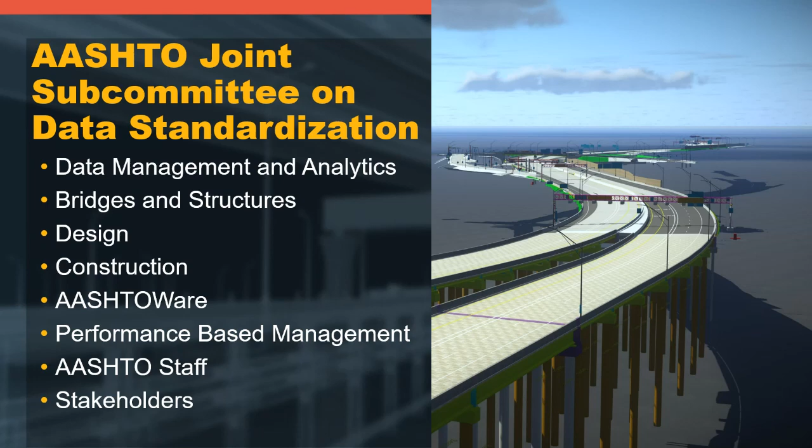And these are some of the high-level goals that Mike provided for this group. And really, a lot of it is coordination. It's coordinating with all these different AASHTO groups, to talk about open data standards and how we coordinate adoption of those standards amongst the groups. And really, Mike has told me too that they really want to eliminate duplication of efforts. So they really want to optimize efforts across the different groups, as AASHTO moves more into open data standards. So like I said, you'll see a lot more on this group in the next few months.

And with that, I'll turn it over to Jim to give an update on the BIM for Bridges and Structures Transportation Pooled Fund. Thanks, Will. Thanks for the opportunity to be here.

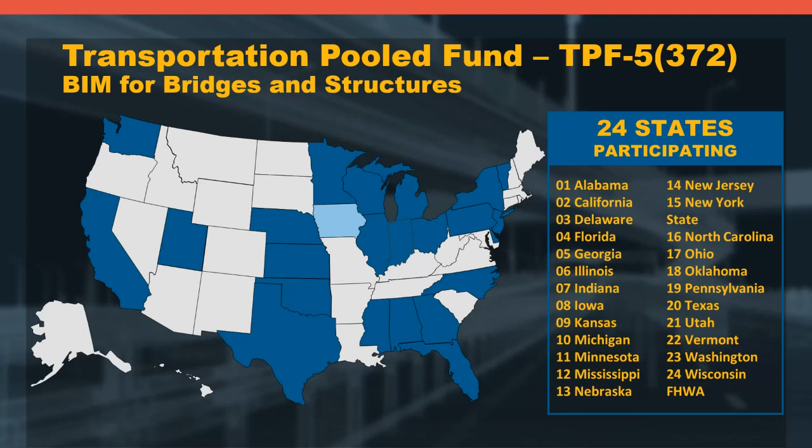The Transportation Pooled Fund, BIM for Bridges, is a product of 24 states and the FHWA. It's very much a national effort that has produced an IDM that will be balloted at COBS this year. In 2019, AASHTO adopted the IFC standard. Next slide, please. As you're probably aware, we are in the midst of a paradigm shift in our industry. We are shifting towards digital delivery, model as a legal document, and digital as-builts. The overall AASHTO Bridge vision is to have a model-based approach through the life cycle of a structure.

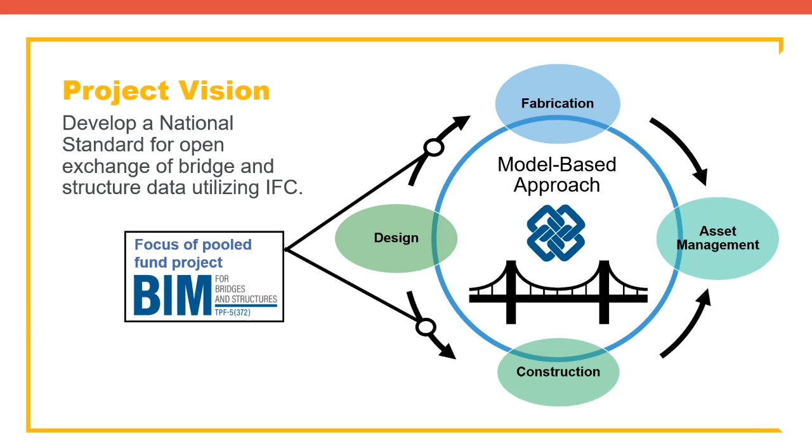The BIM for Bridge Pooled Fund project is a critical piece of the puzzle so that these things are even a possibility. The focus of the BIM for Bridge Pooled Fund project is related to the exchange of information, the design process to fabrication and construction. The project is about developing a software standard utilizing the international non-proprietary IFC. A separate BIM for infrastructure project will be starting soon. 18 states have committed to sponsor. Hopefully this will be getting started in '22 or '23. More states are welcome to sponsor. Next slide, please.

A BIM for Bridge project objective led to the adoption of the IFC for the U.S. bridge industry. But what does this mean? So an analogy is a PDF is a 2D exchange, essentially a national standard, although not officially necessary. PDFs work because it's an ISO standard. It's an open, non-proprietary format. It's easy to share PDFs. Most softwares have an export to PDF button.

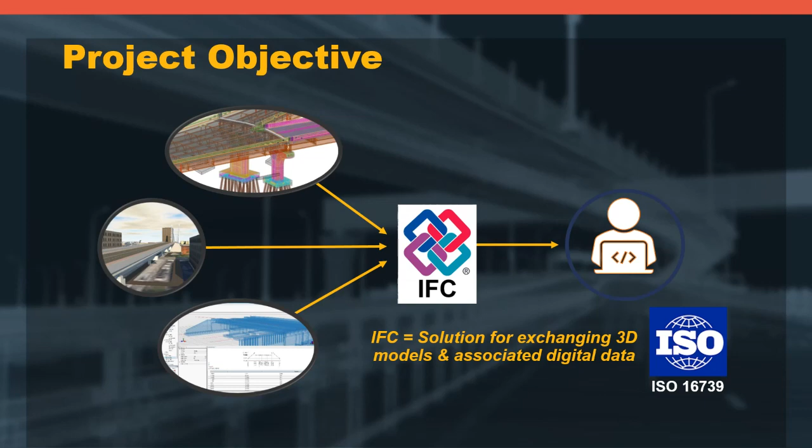Going back to the project objectives, IFC is a solution for exchanging 3D models and associated data. IFC is also an open, non-proprietary format. It is also an ISO standard. The challenge is that software does not have this export to IFC button yet for modeling bridges. The goal of this pooled fund is to make that happen. IFC 4.3 is expected to get ISO acceptance either in Q1 or Q2 of '23. Next slide, please.

The BIM for Bridge pooled fund objectives. Objective 1 was to develop IDMs. This will be balloted this year, and I'll talk a little bit more about that in a little bit. Objective 2 is develop MVDs. The first MVD is close to being completed and is expected to be balloted next year. Outcome 3, development of a software certification is being developed currently along with the unit test suite and should be completed by the end of year 5 work. Stakeholder training is scoped and is part of year 5 work. Next slide, please.

So what is an IDM? An IDM is a document that captures the information that's needed to be exchanged for a specific purpose that will be balloted at COBS this year. An IDM provides a human readable set of information requirements for exchange of model-based information to execute the construction of highway bridges in the United States. It provides an industry narrative that defines the data requirements and informs the development of IFC technical details.

Next slide. The current IDM being balloted is from design to construction: specific data exchanges for design to construction for a set of bridge types. Currently, we have not focused on unique structures, but are focusing on what the majority of the bridges are. So we had slab bridges, girders will be defined, common buried structures, retaining walls. Additional IDMs can be built for other uses in the future, construction to as-builts and as-builts to asset management to complete that life cycle management. Next slide, please.

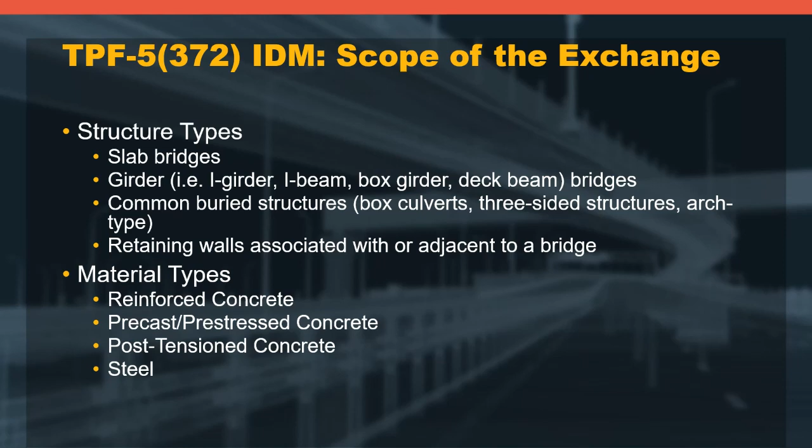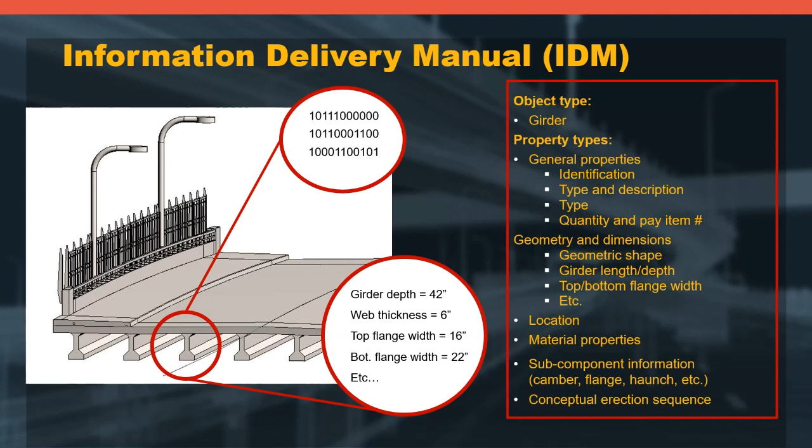Oh, kind of already covered this one. This is kind of the data that's associated: a pre-stressed girder, you got to define the strands, depth, and all the items associated with it. I think we can move on to the next slide.

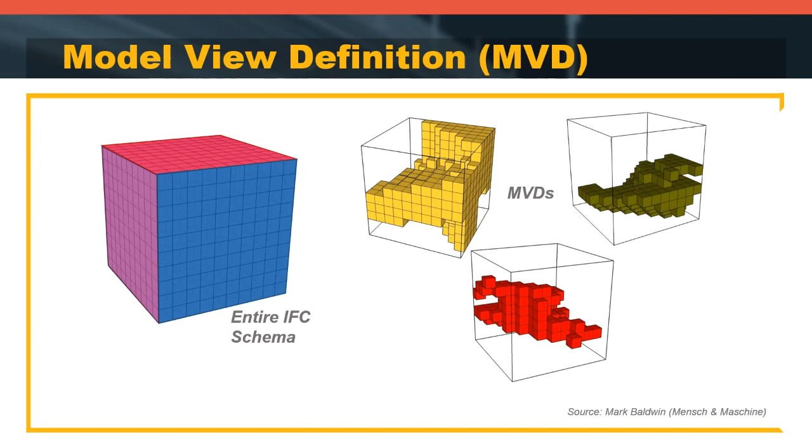So I want to talk about model view definitions a little bit, just because we talked about IDMs. A model view definition is a subset of the overall IFC schema. It is necessary to support one or many specific data exchange requirements. Model view definitions allow us to exchange only the information that is needed for a particular transaction. Software vendors then implement specific model view definitions. The combination of all the model view definitions are what make up the entire federated digital model that someday, hopefully soon, we will have. Next slide.

So the BIM for Bridge Pooled Fund received a 1-year extension, and that's year 5. We've identified some tasks that we wanted to complete with this 1-year extension. We're going to provide technical assistance to the vendors during the buildingSMART International (BSI) certification process, and develop transition plans with recommendations for continued management of the collaboration. Next slide.

The second BIM for Bridge Pooled Fund. So 18 states have committed to funding the BIM for Infrastructure Pooled Fund, and more states are welcome to sponsor. The second BIM for Bridge Pooled Fund will be a continuation of the first BIM for Bridge Pooled Fund. We developed one IDM as part of the first BIM for Bridge Pooled Fund. We need to develop more.

There is a separate, as I just mentioned, BIM for Infrastructure Pooled Fund, and this would be a parallel effort with them. So a lot of things need to happen, but in order to keep pushing BIM for bridges along and keep developing and keep the momentum we have, we felt it's necessary to have a second BIM for Bridge Pooled Fund. And so we've gotten, I think, 10, 11 commitments already, and would be very happy to have more sponsors and continue that effort moving forward.

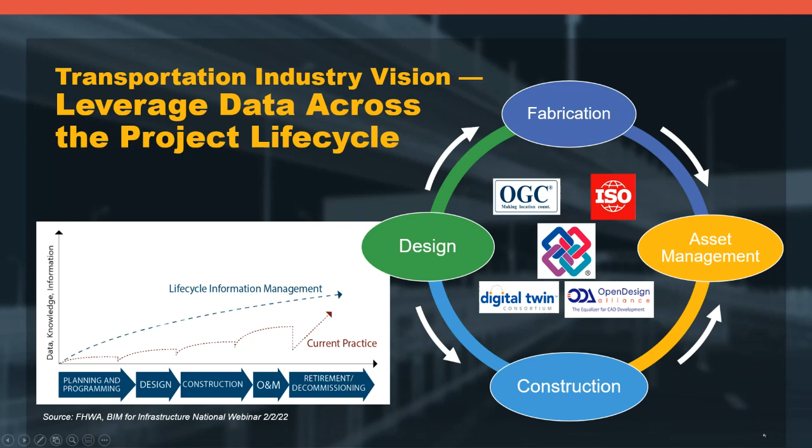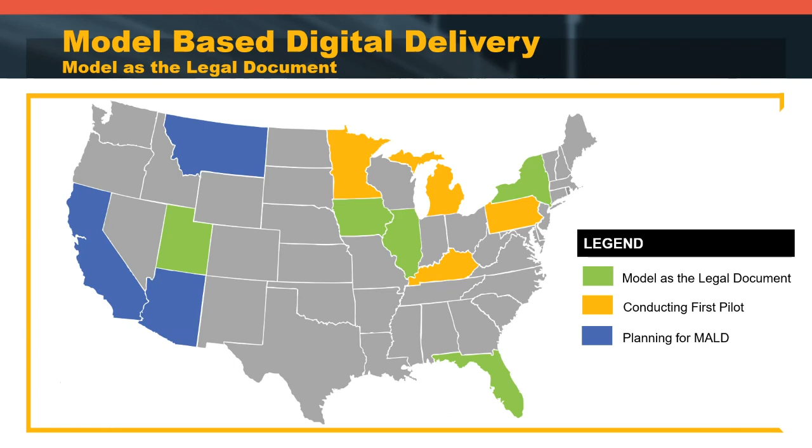So I often get asked, and we talk about this a lot with ACEC, with the Transportation and Risk Management Committees, how is the risk different when using BIM as a contractual deliverable? And there's several things to keep in mind here. One is the tremendous amount of digital data involved. We're talking construction level accuracy models that'll support automated machine guidance, grading and paving, so that's much more challenging to develop and check that information. I can tell you also from the consultant perspective, there's many unknowns with these 3D contractual deliverables. There's no established standard of care with this type of data.

So next slide. So one of the things that John Rathke and I did with Matt Reifer's help with ACEC is we sent a national survey to the engineering companies just to identify, what are your concerns with model as legal document. So this was back in February of 2020. These are the top 5 concerns that were noted. Number 1, data security. How do we lock down these digital deliverables so they cannot be inadvertently changed? Number 2, clear definition of the model accuracies and tolerances.

I can tell you as a professional engineer, we need to understand what we're signing, and really what level of information is really expected with these. How do you QC these 3D models? There were also discussions about lack of contractor experience. I know many of the major contractors have embraced digital delivery in BIM, but many of the subs have not. And how are they going to use this 3D model information? How are we going to get it into formats that they can use with their software? And then the last issue was just the investment moving to this new technology.

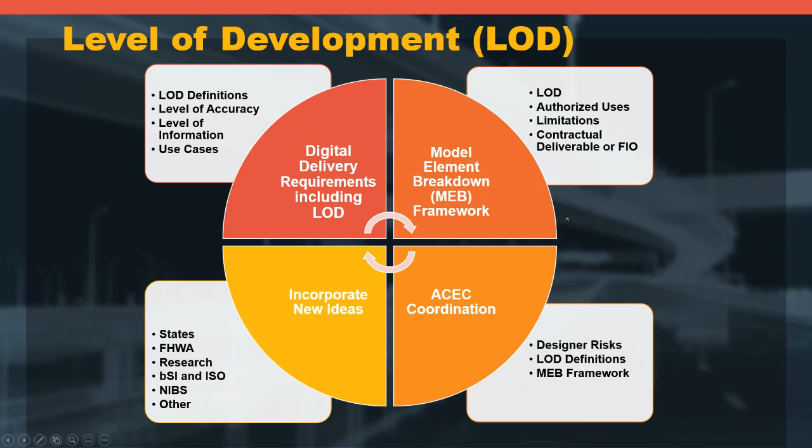So next slide. So with that, I'm going to turn it back over to George to go through designer perspectives. Thanks, Will. So we're going to have 4 of our consultants talk about their experiences delivering projects with model as the legal document. Today we have Grant Schmitz, Nicole Williams, Gordon Green, and Tyler Turner. Grant Schmitz is a bridge engineer in HDR's Des Moines office. He has 9 years of experience in bridge design, modeling, and inspection work. Grant's been heavily involved in BIM for bridges and structures over the last 5 years. His work assisting with the development of the I-80 and I-380 bridge BIM models led to one of the nation's first 3D BIM deliverables for a design-bid-build contract. Since then, he's been involved with a number of other states and national initiatives to promote and enhance the use of BIM.

Gordon Green is the Executive Vice President at Patel Green and Associates. With more than 22 years of experience, he has built a diverse technical foundation, serving as a project manager, engineer of record, and principal in charge of projects throughout Florida. He served as project manager and roadway engineer of record for the Polk Parkway 3D AMG pilot project for Florida's Turnpike Enterprise, where the roadway and drainage models were signed and sealed as a legal document. He also is currently serving as project manager for another 3D AMG pilot project for a new alignment project. It's the Central Polk Parkway from US 17 to SR 60 for Florida's Turnpike Enterprise that will also be signed and sealed with the model as the legal contract document.

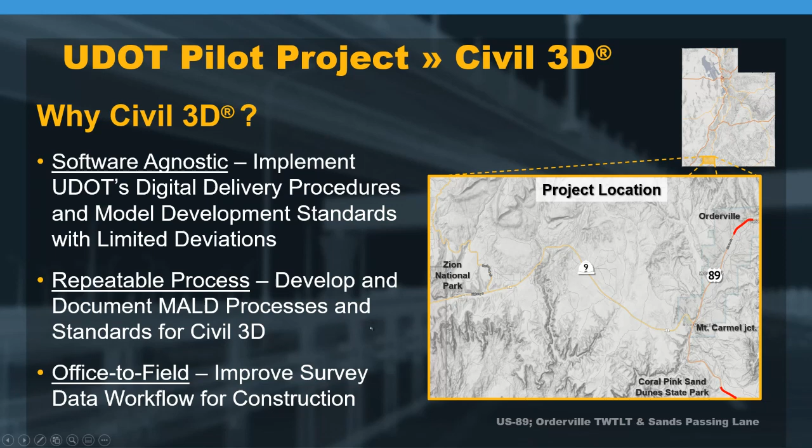One of the biggest challenges we had to overcome on this project was that we had no standards for Civil 3D. UDOT has done a great job in developing their model development standards, but they were built around Bentley workspaces. So not only were we delivering a models legal document project, but we also created the start of what we're calling a Civil 3D state kit or standards that could be used on other projects in the future should UDOT choose to do others. What we found as we started to develop that state kit was that it was an iterative process.

There were several challenges that we experienced along the way, as with a lot of projects, but we had a couple of challenges in addition to what you might see on a typical project, in the fact that we were taking UDOT's workspace standards and their model development standards and creating them for Civil 3D. I'll go over a couple of the challenges that we experienced here. We'll probably talk about some of the others in our upcoming panel discussion. We used BIM 360 on this project. Randy, if you go back to the previous slide for just a second. Thank you.

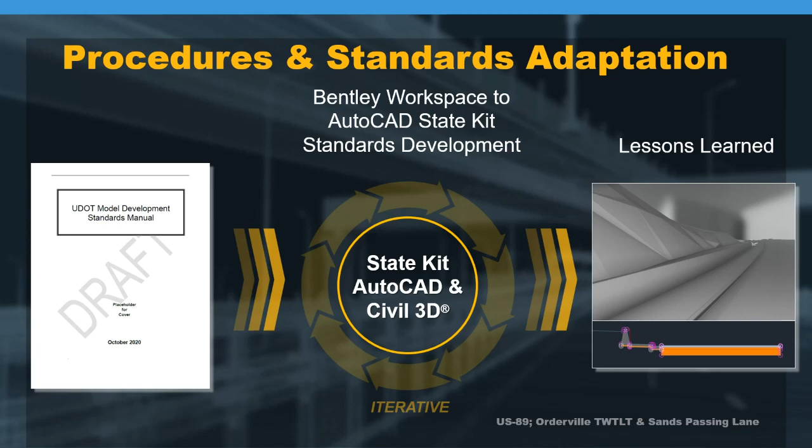All right, Randy, next slide.

I mentioned some of the challenges before. The success of this project really was the team. Autodesk had a dedicated team on their side as we worked through the challenges in development of the standards and the templates. That state kit that we talked about, they were in all of our meetings and a big part of the evolution and the success of the project.

We also had Kiewit involved. I mentioned earlier the office to field goal. That was a big focus as we kicked off the project, and they played a key role in reviewing our files and providing feedback to ensure that they were consumable as we were using a new format. So a big part of it was the team. Next, Randy.

So how to review design files is always a concern on these projects. I like to bring up and share successes, and I feel like one of the things that went really well on this project were the design reviews. I mentioned before that we used BIM 360.

We went all in on the use of that as the file management. And inside BIM 360, they have some great review tools that allow not only the designers, but really the entire team, construction, contractors to get in and review and make comments.

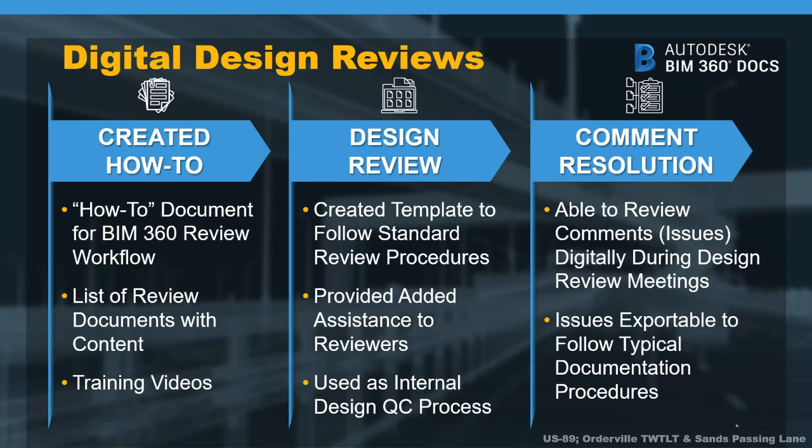And then ultimately, as it went towards comment resolution, we're able to track changes and show how those were resolved. Like I mentioned, I feel like the reviews on this project were one of the bigger successes. Next slide.

Just real quickly, this shows that workflow within BIM 360 on the right. You can see graphically how a reviewer can open a file, go in and actually pick a point on the file and show the location of their comment or their concern, and then the template that we created allowed them to give a description to their comment.

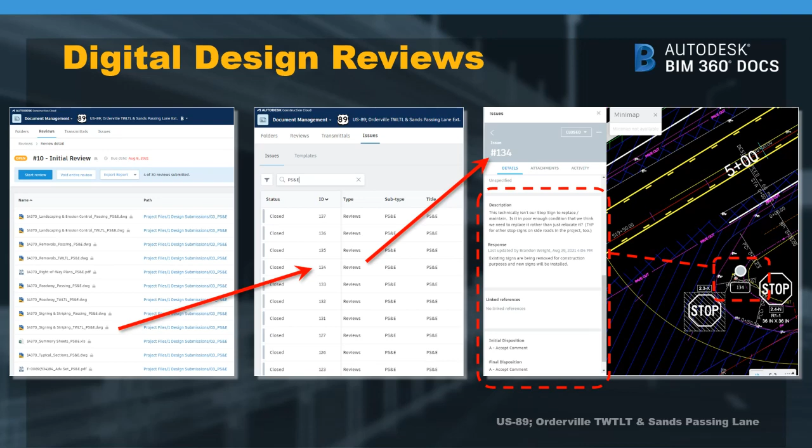And ultimately that workflow shows how a designer, a modeler can go in and look at their files, track the issues or the comments through the entire length of the project. This is a quick summary of the highlights of this project. The project just started construction, so we're looking forward to getting some feedback from construction. With that, I'll transition to Nicole to let her discuss her project.

Thank you, Tyler. Next slide. So I've been involved in 6 digital delivery projects in various different roles, as well as a few others with just some minor roles. For my section of the presentation, I'd like to focus not on a single project, but a little bit more on the overall thoughts on the digital delivery projects and the process overall.

In the beginning, UDOT started their digital delivery projects including plan sheets to be used as information only. But as our designers and contractors got more comfortable with digital delivery, we've transitioned to fully digital delivery, with the exception of structures, as they're piloting their very own projects on the side. SR-209, which is our 9000 South project, was the first UDOT project that didn't have any plan sheets. And we learned so much from that experience that has really helped shape a lot of what we do now.

Utilizing this project experience, I was able to help UDOT develop their digital delivery guidelines, their one-stop shop website, as well as our ORD workspace as the project manager for the digital delivery and process development grant project that just wrapped. I would like to talk a little bit more on some of the challenges that we came across that ultimately got translated into solutions and developed into guidelines for future use. Next slide.

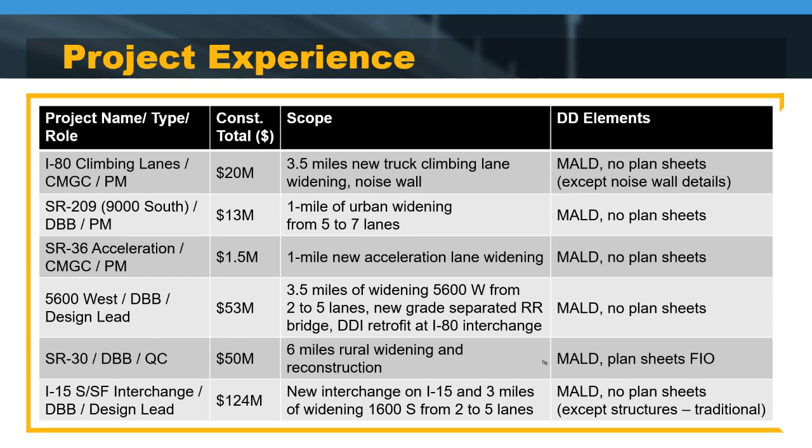So one of the things I think that a lot of people have concerns about or feel like is a challenge is just the translation between software. There is no easy button to convert MicroStation or Bentley ORD files into other softwares such as GIS, Trimble, TopCon, Leica when we first started. And so there was just a lot of concern on making sure that the information that the contractors got was the same as the information that the designers created.

And in the beginning, there really was no international BIM format that has been released, and still isn't completely released. And so no defined format means every software developer processes 3D breaklines differently, and the contractor has to try to decipher the designer's model and, more importantly, the designer's intent.

And so one of the things that we learned as we went through our pilot projects is that it was extremely important to have a file naming convention, a template point naming convention, CAD validation, and a GIS conversion or some type of a conversion platform. The template point naming convention specifically being so that we could translate that into a 3D breaklines file and deliver that to the contractor. And when they read those 3D breaklines, they understood exactly what point was what and how it related back to our templates in our modeling scenario.

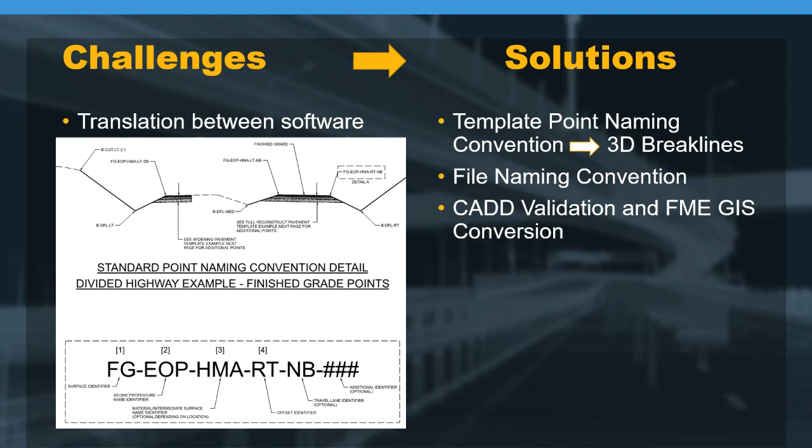So some of the other challenges, and I know Tyler touched on some of the reviews already, but some of the challenges that we have come across and are still trying to work out is just how do we get design reviews for UDOT, for cities, utility owners, and key stakeholders that may not even have ORD as software on their computer. And I think that this was a really big hurdle that we had to get over at first. And so our team had to provide trainings before reviews. We developed several different platforms to do reviews in, including simple PDFs, Google Earth, and GIS maps.

Currently on my Springville Spanish Fork digital delivery project, we are piloting a GIS review tool, which you can see a screenshot of there in the bottom right. It allows reviewers to go in and add a comment per specific discipline, and then we can extract those all into a comment resolution form. And so we're trying that out, but to date, there isn't really a great tool to allow them to see a 3D review, other than displaying contours, which still doesn't give them as much information as they would like.

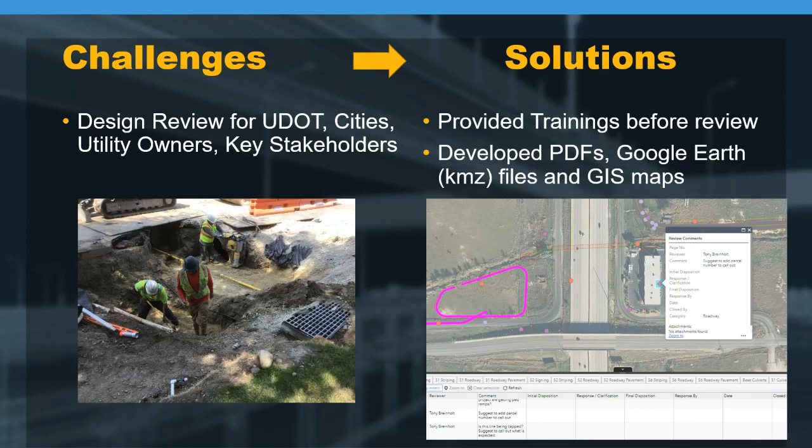Quality control is another big topic and issue, and a lot of people have a lot of questions about it. Going back to our first digital delivery project, we piloted a method where we did a save as of the DGN, and we actually physically yellowed out things and went through UDOT's green, yellow, blue checklist process. And it was okay, but it wasn't ideal for what we were trying to do.

And it was hard to track what had been checked and if something had changed after it had been checked with that method. And so on our current project, we're piloting an item types quality control review. And we are utilizing those item types to track each of the QC checklist steps.

And then we're using filters to filter on and off and highlight at what step each of the elements within the design are at. And again, we are doing a save as of the original file first, so that if the design changes, it doesn't just reflect in the QC drawing. But that gives us a snapshot at every single deliverable. And from a QA standpoint, they're able to quickly turn filters on and off to determine whether or not each step of the QC process has been completed for every single element within the drawing.

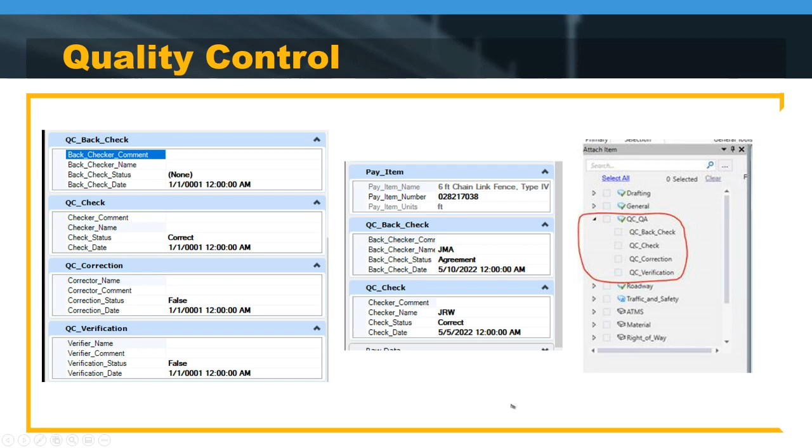And we've seen some really good results with this. We're really excited to be trying this out. All right, next slide.

So a few other things for everybody to consider that's different than normal delivery is normally we deliver a handful of documents, mainly plans, specs, and estimates. With digital delivery, you deliver hundreds of files, and that's why organization, standard naming convention, and standardization are so important. This allows the contractor to digest these files in a timely manner instead of just spending weeks sifting through files trying to figure out what everything is.

If you model everything in 3D that's underground, such as utilities, street lights, storm drain, signal poles, signs, etc., to the best of your ability with the information that you have, you can also run clash detection, which we found is really beneficial because you can set any offset on those elements, run the clash detection, and figure out where you may have conflicts, and you can fix them in the pre-construction phase of the project instead of waiting until the construction phase. And so what we've seen is a reduced number of change orders in the field.

One example on my 9000 South project was that we ran clash detection and discovered that we had placed all of our signposts punching straight through a storm drain. And when we ran that clash detection, it highlighted all of those areas. And so we were able to adjust our signposts to not punch through the storm drain, but also add notes so that the sign contractor understood why we changed it from a standard offset. And we were able to update that in pre-construction and didn't have that conflict when we got to construction.

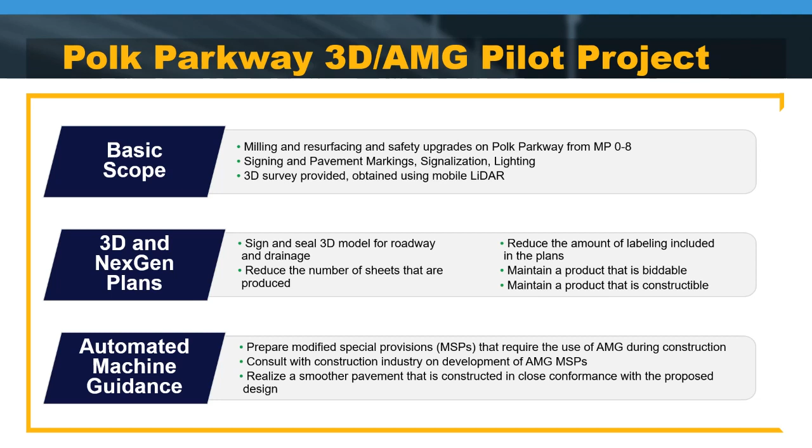Some of our goals, other than just signing and sealing that model, were to leverage that and reduce the number of sheets that are produced in the plan set, as well as the amount of labeling that was included on those plans, all while balancing and maintaining a product that is both biddable and obviously constructible. And then there was the use of that AMG. So we actually wrote specs to require the use of AMG during construction. It was really helpful. We had a couple meetings with the construction industry, brought them in to review those revised specs and get their feedback. That helped us, I think, develop a much better product there. Next slide.

So some of the challenges that we faced, for the most part, it was as expected. We knew we were preparing a 3D model, but some of the surprises were things that can be prepared pretty simply with traditional 2D plans. So that detail on the top right was something we had to prepare because of an issue on one of the ramps where the pavement thickness on the shoulder by what we were doing was creating a 3/4 inch lip, and so we wanted to make that flush.

Drawing up that detail traditionally might have taken 30 minutes, an hour, something like that. Well, when you're signing and sealing the model and that surface, you got to model all that, so you got to do custom templates. You got to get in there and customize that, and that takes some extra time. So that's just one example of where you definitely have to pay attention to make sure these little details are covered in the model, not just with the detail.

And then many of you, if you've been doing 3D modeling and converting those to XML surfaces, you know we have to eliminate vertical faces. So that was something we learned back when we were doing this project. I guess it's been 3 or 4 years ago now. So we learned the best ways to do that.

And then QC review. So we're maybe a little more rudimentary, at least we were then. You can see in the bottom right, that's a snip from some of our actual QC documents where we snip it and circle it. But if you look close, you can see the dark blue and light blue. That's our 3D model in section view. And then what we started to do is we would take the XML surface that we were generating. This is the surface that we're actually sending to the contractor to plug into their equipment. We run it back through the sections as a surface.

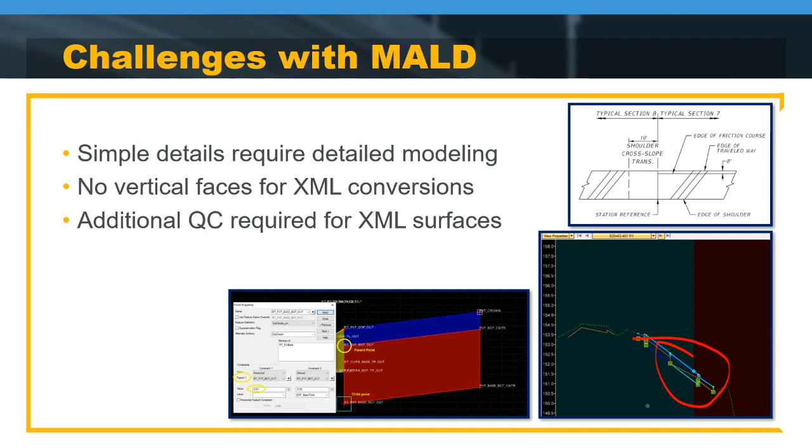Another challenge was in the actual signing and sealing. So we signed and sealed 2 groups of things. We actually signed and sealed the DGN files as well as the XML files. So XML file signing was a piece of cake. FDOT Central Office has created a tool that makes it real simple. You can batch sign, you can put all the language in there you need, and it's great.

The Bentley digital signature tool is pretty buggy, not very stable, and was not set up to accommodate the required language. You can see what we had to do there. That figure on top, we had to break it up into 3 separate fields. A little janky, but we made it work. And there's no batch signing, so you have to go into each individual one. So that was definitely not ideal.

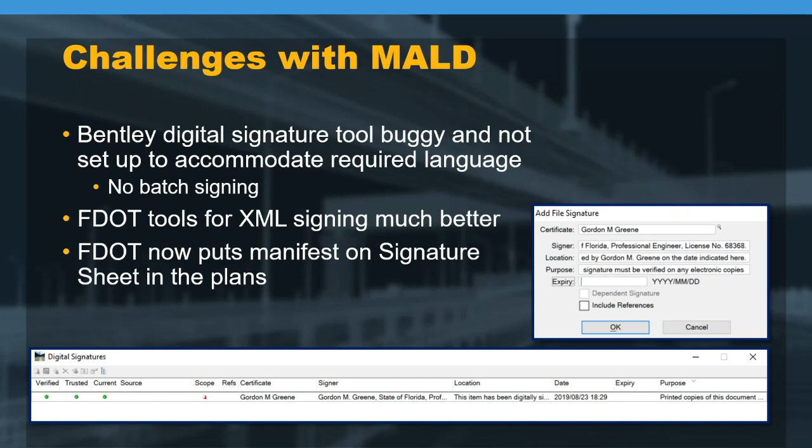FDOT since then, I guess as part of a lesson learned from that project, is moving forward with a manifest on the signature sheet in the 2D plans, which I think is similar to how UDOT and maybe some other states have done it in the past. So we've solved that problem. Next slide.

Some of our construction lessons learned in terms of AMG performance in the milling and paving. We learned from the contractors that the milling is very responsive and accurate. They have a lot of trust in milling to that surface very closely. They are much less confident in the paving. It's less responsive and ride can suffer. So we did AMG for everything. So the correction areas, the match existing areas, everything.

And so when you're trying to model a match existing, you're really just matching whatever that surveyed surface is. The cross slope is constantly varying. And while the mill can handle that okay, the paver really cannot. Same thing with the superelevation transition areas. So we had to keep an eye on that.

And some lessons learned we had was, moving forward, we may only apply AMG to the correction areas and AMG for milling only, and let the contractor and their experienced paving operators do their thing when it comes to uniform lifts coming back up from the mill. Next slide, please.

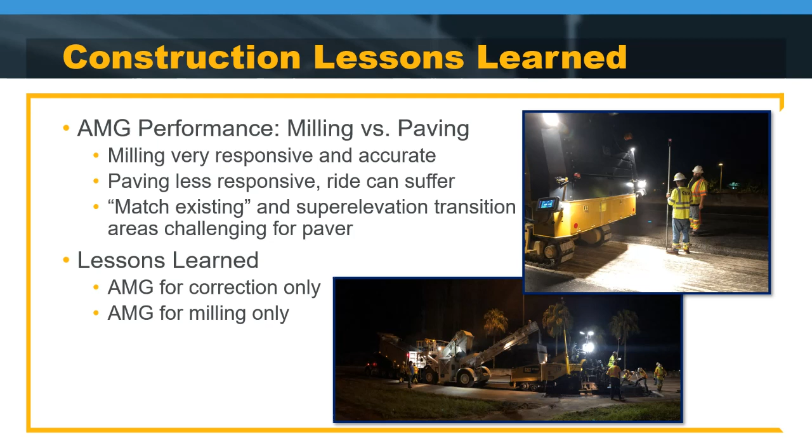In terms of data interoperability, it was a little disappointing that our signed and sealed XML files were immediately converted by the contractor's vendor when it came to them, to get them into the Trimble equipment or whatever it is they're using. Ideally, we'd like to see our signed and sealed surfaces feed right in, and so maybe some of that IFC stuff we learned about earlier will solve that problem.

Other issues were model review by the contractor. We didn't really have a good digital design review tool available to us, and as you might expect, construction staff was very limited, basically zero CAD proficiency, and so it was left to us to give a crash course in MicroStation to the contractor, but more so to the CEI staff who had tasks to perform and needed to get into those files, and they had to learn to get into the native files, which can be cumbersome to folks that really have no experience.

I think this is my last one. So some more lessons learned. When we got out there, the contractor was experiencing holes, what we call them, in the 3D surface. As you see in that top graphic, that big dip was occurring at template transitions. And so the solution the contractor came up with was to just turn the AMG off when he saw this coming, and then turn it back on when he got to the other side. It's only about 10 to 15 feet, so it wasn't a big deal, but obviously sort of mortifying for us.

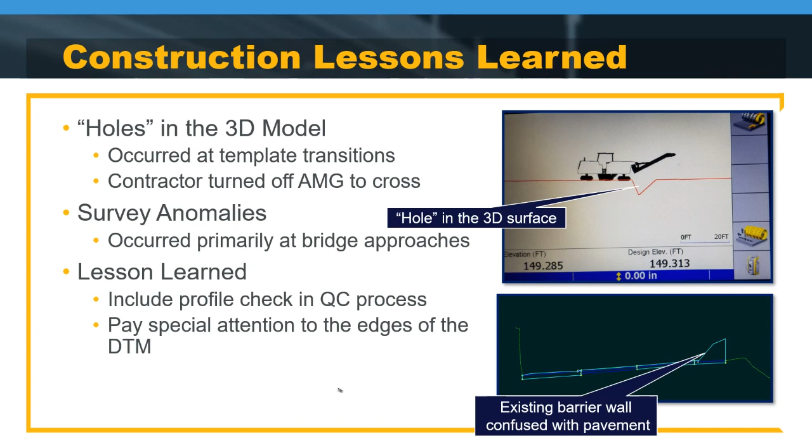And so the lesson learned there is, yeah, we check the cross sections like I showed you earlier, but we probably need to check the profile too, so we can identify those dips and fix those before they go out. And then just checking your survey when that comes in. You can have issues like you see here with existing barrier walls being confused with pavement, and clean that stuff up as it comes up. I think that was my last slide. So yeah, we'll hand it over to Grant, who I think is going to talk about bridge modeling.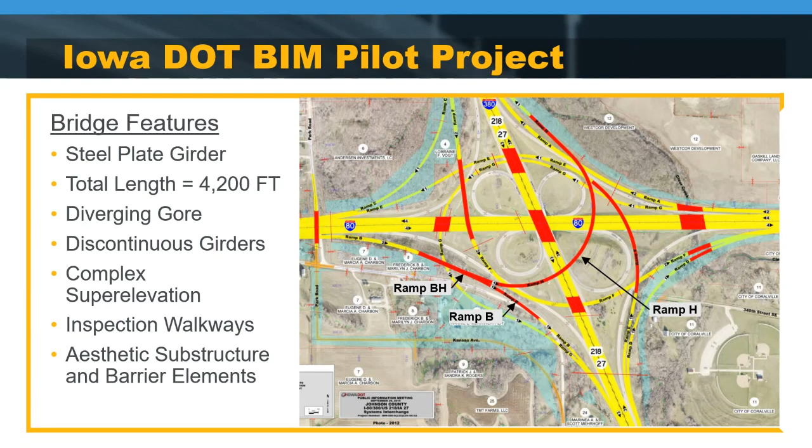Some of the unique features of this that really pushed the boundaries of the software: the diverging gore area in ramp BH. We had discontinuous girders. We had complex superelevation, inspection walkways in each of the girder bays. This is something Iowa DOT has been doing on some of their longer bridges just to ease the inspection access. And then we had a number of aesthetic requirements. The substructure elements were not your generic circular or rectangular elements. They were flared hammerhead piers, and we also had some aesthetic features in the barrier elements. Next slide, please.

So to go over the goals of this project, the initial goal was to develop a BIM model as complete as possible. We used Bentley software in their recommended workflow of OpenBridge Modeler, ProStructures. At the time, when we modeled this project back in 2017, 2018, Navigator Connect was the solution for a multi-platform viewing tool. OpenBridge Modeler and ProStructures were our primary design tools. Lastly, we wanted to encourage contractor use. And what we're finding today is that's really a big one. A challenge we're running into is really getting contractors on board. As you've heard in some of the other presentations, it's critical to allow us to move forward with this process. Next slide, please.

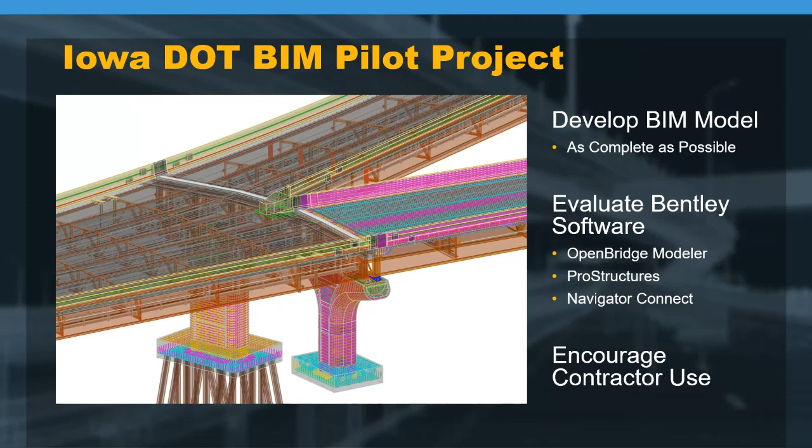So to give a quick overview of the BIM delivery method, initially when we started this project, all 3 bridges were going to be provided for information only. Ramp BH and Ramp H were delivered for information only, and we had a full 2D set of plans.

We held regular meetings with the contractor, not only to gather that feedback, but to also provide support to them as well. Signing and sealing for this was handled through a special provision. This was a new process for the DOT, and really it worked well. We not only provided the seals and list of covered documents, but also touched on things such as level of development, deficiencies just due to software limitations at the time.

This was a design bid build project, and as such, we really didn't have a lot of opportunity to work with a specific contractor on their workflows and how to utilize the model. So we did a number of training sessions. We had a contractor information meeting where we brought all interested contractors that would potentially bid on the project to Ames, Iowa, to go over the model in person. We also posted some training videos to support that.

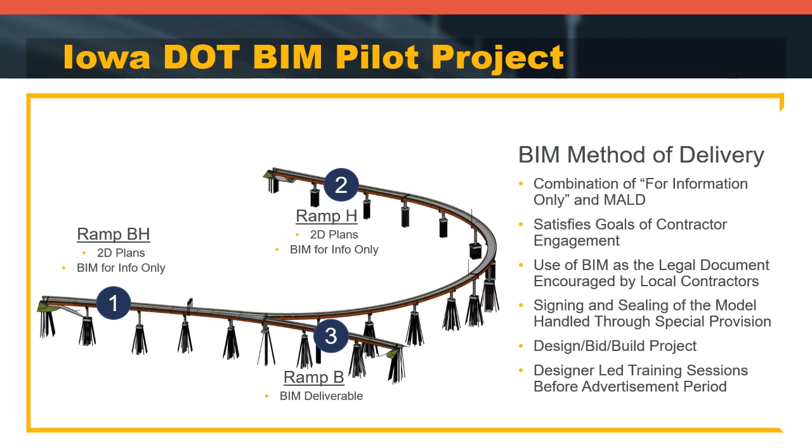So as I mentioned, we gathered some of the contractor feedback throughout the process. Construction wrapped up in the fall of 2020. So our feedback, I think, is pretty much wrapped up from that standpoint. The biggest one from an advantage standpoint was visualization. I think it's probably one of the more obvious benefits, at least for the bridge side of things.

They did have some challenges pulling certain information, cutting sheets and providing information to subs. The smaller subs don't want to invest in the expensive software, although there are some free alternatives for Bentley. I think Bentley View was used by them at the time.

And lastly, it's just working with technology in the field as you're trying to build the formwork for a bridge. We've all experienced the challenges with technology and the environment. So, battery life, cold weather, gloves, and trying to touch a touchscreen. They're all challenges that they learn to deal with.